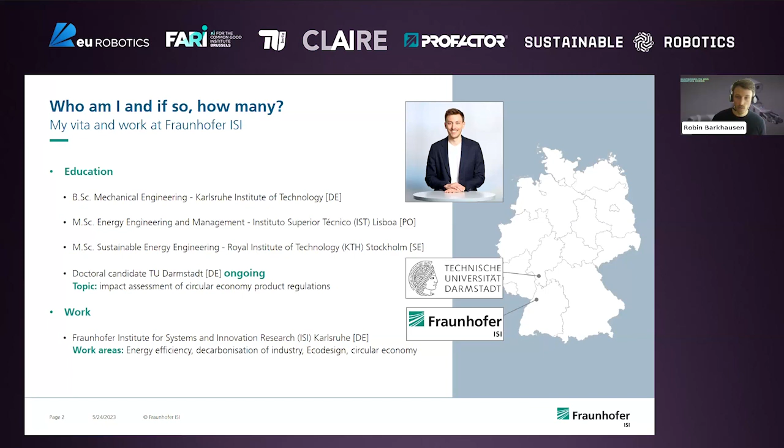A few words about sustainability and the importance of products and product policies. So why to care about product sustainability? I'm aware that this was covered during the last webinars, so I will keep that part short, but I still think it's important to have this as the baseline, also the motivation of why I'm doing what I'm doing.

Then the second part is actually who cares about sustainability? So talking about the policy landscape and in particular the product regulation on EU level, and especially the eco-design directive, since this is my area of research.

Then how to care about sustainability. We learned already about LCA from Paula, so I extend a bit on that by the EU angle with the product environmental footprint. And lastly, a short example of batteries. And of course, I will try to put everything a bit into relation to robotics.

This is overall meant as an overview of what happens on the policy side for products on the EU level and why this is happening.

So sustainability, it's a buzzword, but it's not new. It was in 1966 that a US economist called Kenneth Boulding defined the term spaceship Earth as a metaphor for the finite resources which we have on the planet. And I like it. I think it's a good picture to realize that we are basically cutting down the tree on which we are sitting.

This discussion then started going and became a bit more concrete in 1972 with the Club of Rome, with the scenario analysis of what will happen if we continue current growth scenarios for population and resource use. Obviously, evidently, they found out that it's not really possible to maintain these growth trends. Actually, they did an update on this book 50 years later, and it showed that their earlier estimations were quite accurate. So how do we prevent that?

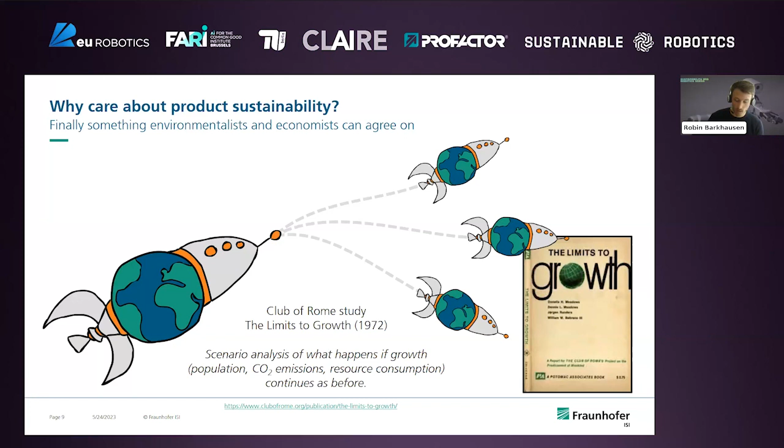I mean, I guess you all know sustainable development: that meets the needs of the present without compromising the ability of future generations to meet their own needs. So we have this concept of intergenerational equity.

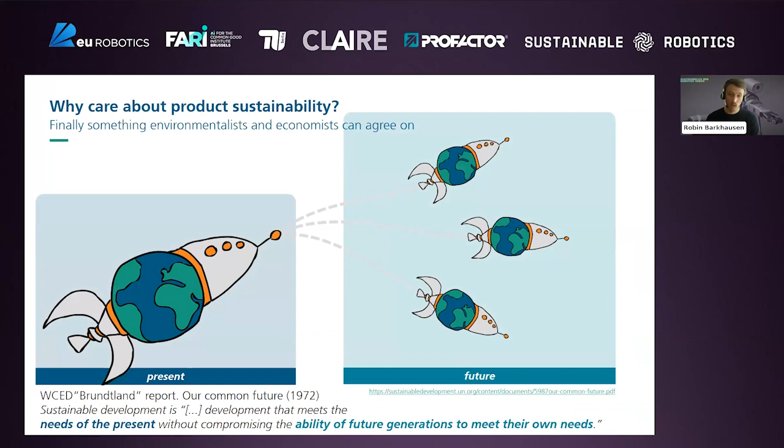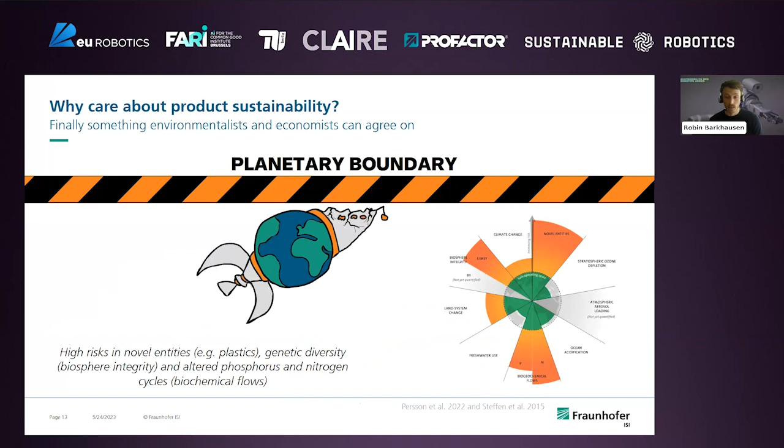And if we jump forward a few decades, then the concept of the planetary boundaries was introduced. I think Damien on his slide was also showing this briefly. So for different environmental impact categories like CO2, biodiversity loss, some researchers try to estimate what are the limits. And actually, as Damien has shown, for several of those, we already are exceeding the safe operating space.

The EU, or the European Commission, with the Joint Research Centre, then wanted to find out how Europeans are actually contributing to this. And they developed the consumer and consumption footprint to estimate the impact of our consumption as Europeans.

And the result is that we as Europeans exceed our share, and especially appliances have a large impact in that, especially in the impact categories of climate change and resource use, where we use up, as Europeans alone, two thirds of the worldwide capacities. So sustainability, there are also social reasons for sustainability.

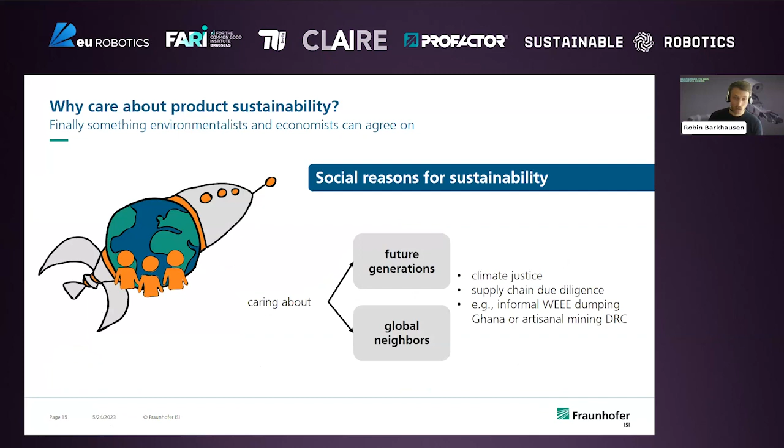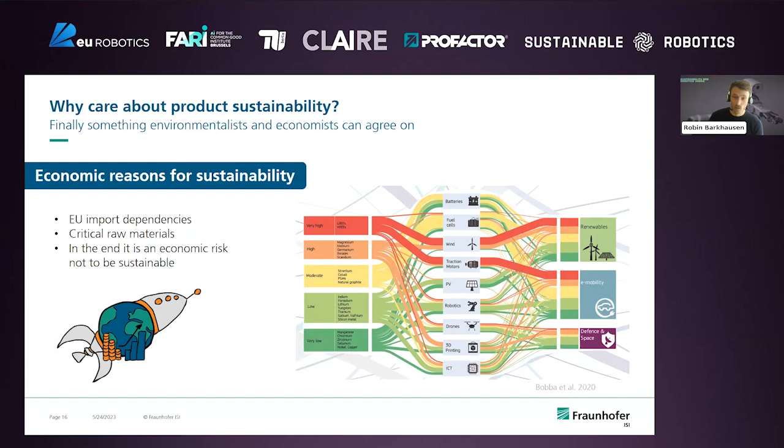You can care about future generations or about our global neighbors. There are economic reasons for sustainability too. There's a high import dependency on many of the key materials which we need, for example, for the energy transition, also for robotics. So it's also possible to say that it's an economic risk to not be sustainable. Overall, there are environmental, social, and economic reasons for sustainability.

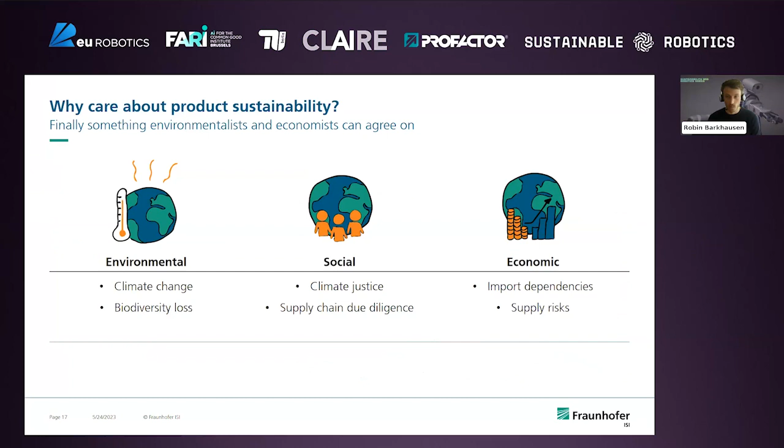Today in the webinar, we focus on the environmental side especially, but of course, everything is interrelated. Especially when we're talking about policies, we always have the economics at the back of the head. So I was checking a bit into robotics, and I found a nice publication, which is from the Joint Research Centre.

It's from 2020, which basically shows which critical raw materials are used in different robotic parts. This just shows that there's actually a lot of critical raw materials used in some form in the robotics sector, making it very relevant to care about these aspects early on, and not when it is too late and we realize we do not have enough of those.

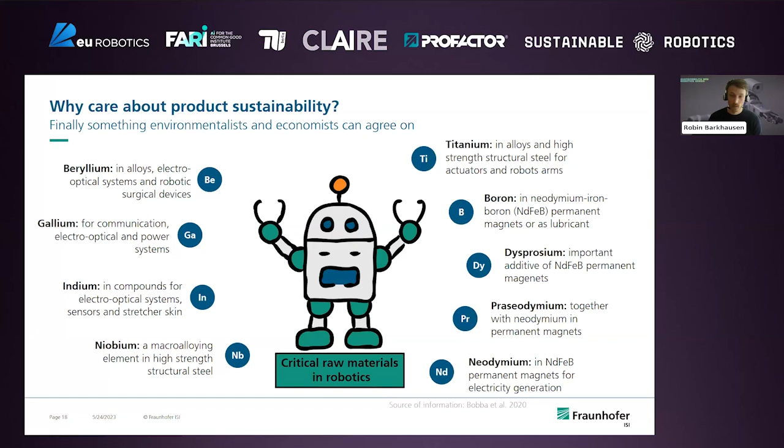So that was basically why to care about sustainability - the environmental, economic, and social reasons. You can pick your favorite.

This brings me then to who actually cares about it, and that's the EU landscape that I want to talk about. I put here a few of the initiatives that are going on in the EU, and I will focus especially on the Eco-Design Directive, since this is my research area. The Eco-Design Framework is basically a policy framework to regulate products with the goal to reduce their environmental footprint.

And the focus so far has been mainly on the energy consumption of the use phase - so how much electricity is my fridge in my home consuming? Under this Eco-Design Framework, we have individual product laws for each product group, in total 27 today.

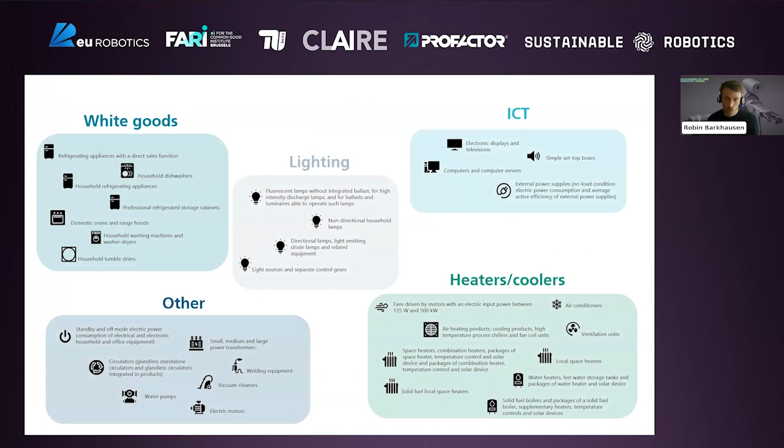I will quickly show which ones those are. We have white goods as the category, so the big white things that are in your houses. We have lighting products, information and communication technology, heaters and coolers, and some others like vacuum cleaners or electric motors, which are of course also relevant for the robotics sector.

We bring those into chronological order. Each bar here represents one legal document, and we count it in green if there are circular economy aspects in those legislations. We evidently see that over time this is increasing, showing that policymakers increasingly care about circular economy and sustainability beyond just the energy consumption in the use phase.

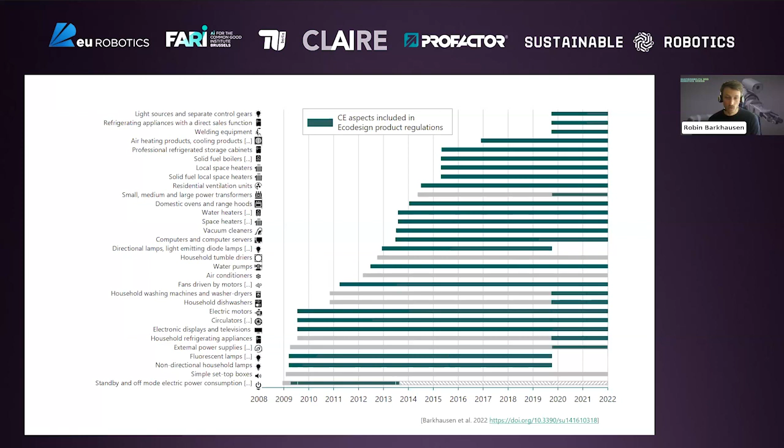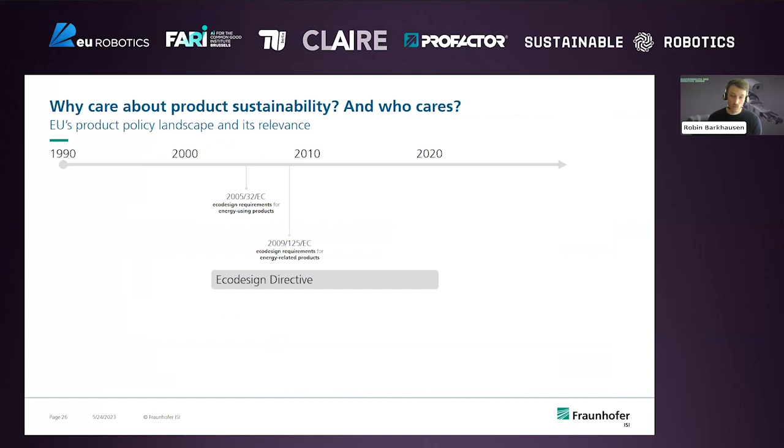The Eco-Design Directive is especially relevant today, and even especially relevant this week, since there's currently an update called the Eco-Design for Sustainable Products, which includes more products. So now we also, for example, include textiles and furniture, which was not the case before, and there's the opportunity for stricter requirements. Earlier this week, there was the first agreement reached in the EU Council on this new regulation.

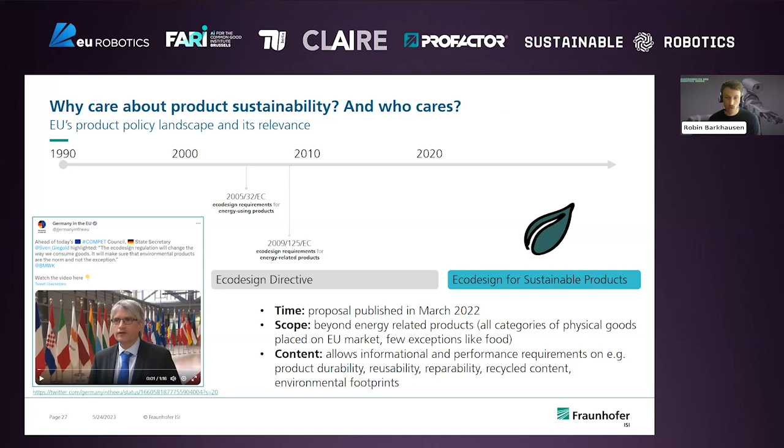We see this on the left, the Twitter post from the German Secretary of State of the Economic Ministry. On the right, we see that now we extend the product scope beyond energy-related products and also beyond energy consumption in the use phase. They make specific notice of requirements like repairability and also the carbon footprint, which is especially interesting to what we're talking about today. So what does this tell us?

Who cares about sustainability? The EU does. And of course, the decisions that are made on the EU policy level are influencing everyone - also companies, and also, of course, people in the robotics sector.

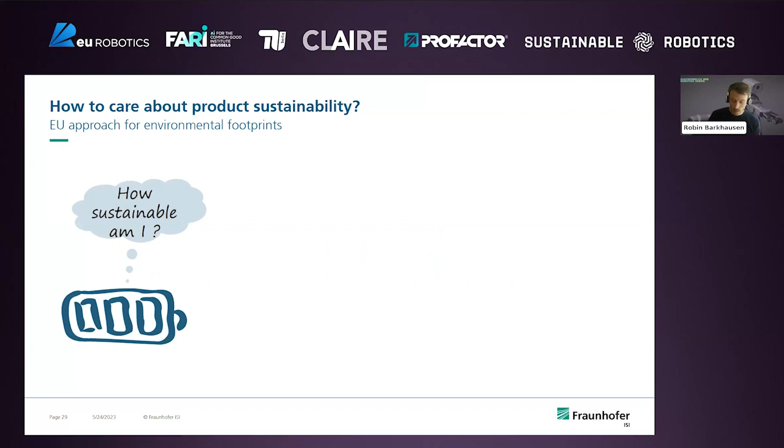If you now ask, but me as a company, as a researcher, how do I care about, or how do I measure sustainability? We learned already from Paula that for the environmental dimension, there is a way with life cycle assessment - a standardized way to assess the environmental impacts throughout the life cycle of a product. As Paula discussed, there are different phases in the LCA.

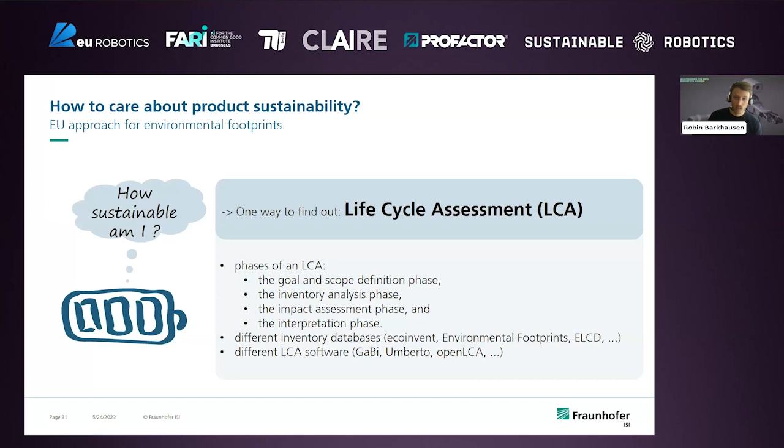You can use different databases for the environmental impacts, different software is there, but despite having this ISO standard, there's a lot of freedom still on how to do it, and it's not easy, as you already learned in the earlier presentations, which makes it difficult to compare different products.

What the European Commission then did was develop a more specified approach called the Product Environmental Footprint, which basically tells you how to do an LCA beyond the ISO standards, so becoming more narrow. By that, I mean the goal is to increase comparability. It's still based on the ISO standard, so it's basically a life cycle approach, and you can consider all the different life cycle stages in that analysis.

And on top of that, it's not the product environmental footprint alone. In addition, you also have product-specific rules, the product environmental footprint category rules, or PEFCR, which are specifically for one product group. For example, they will define the relevant impact categories for batteries, saying focus on these three because they are the most relevant for this product group. They also define default data sources, so if you cannot collect primary data yourself, such as measurements in your factory producing the batteries, you take these values instead, so that it's more comparable.

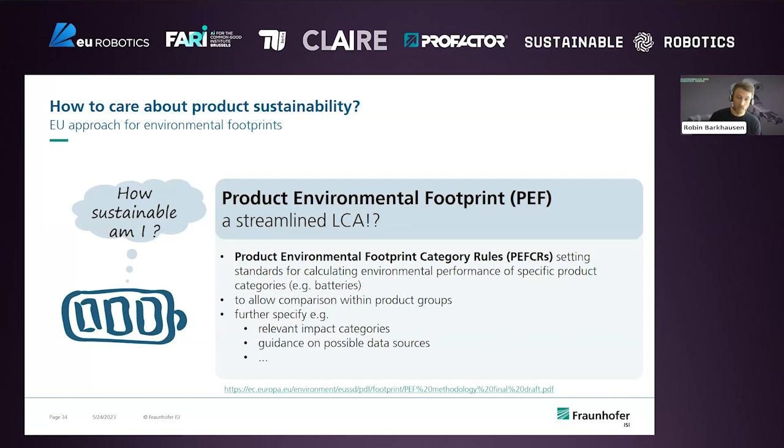So what should you take from this? I think you should take that there is something to measure, and maybe explore to at least find out which environmental hotspots are in your robotic systems. And this brings me to the last part and the example of batteries.

Batteries are interesting because the legislation is very advanced in terms of circular economy measures. There's a recent proposal for a new battery regulation, which will probably be published or enter into law this year. In this proposal, they actually include a carbon footprint, which is very innovative, going beyond what has happened for other product groups.

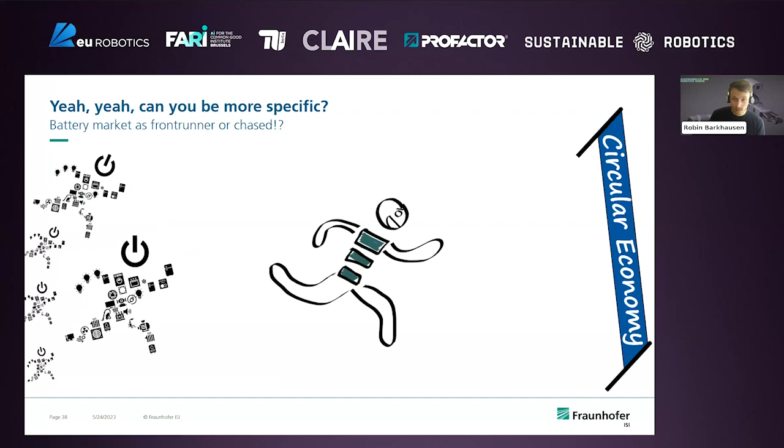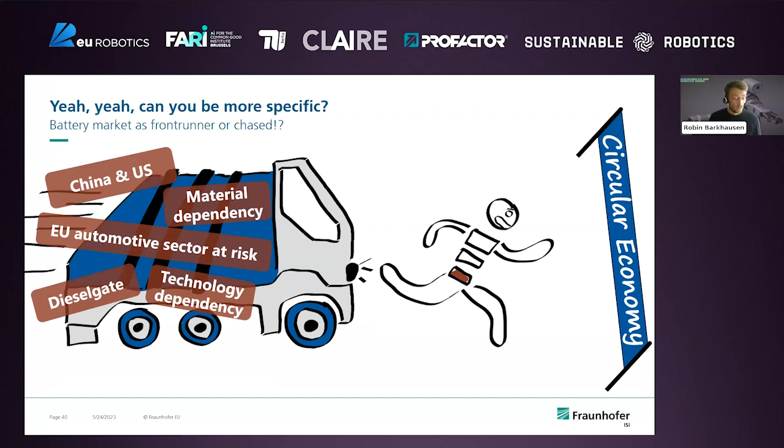So based on this, you could say that batteries are the front runner compared to other product groups, but maybe they are also rather chased. Why chased? By technological and material dependency, and the European automotive sector being at risk with electric vehicles. Because with this evolution from combustion engines to electric vehicles, the heart of the car, which used to be the combustion engine, now shifts to the battery, and there's a high dependency in Europe for that.

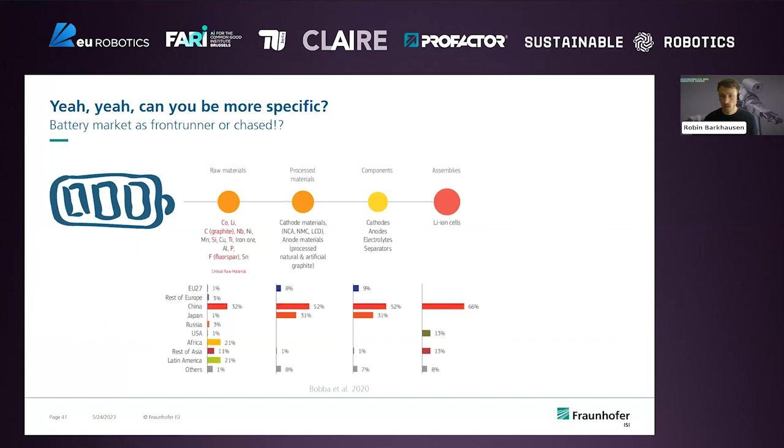Here we see the technological dependency. Throughout the entire supply chain, a lot is coming from Asia, from China and Japan, and from raw materials as well. Lithium coming from Australia, but also a lot from South America where the largest resources are, and cobalt, over half of the worldwide resources are in the Democratic Republic of Congo. So the EU is completely dependent.

This brings me back to this ambitious legislation, where you could say that the legislators had to act because the battery sector, or in effect the automotive sector, was a bit too late to realize this trend. The EU now has to put a lot of pressure on manufacturers towards circular economy, with the aim to decrease this material dependency, so we get the materials back which we have in the cars, and also to differentiate EU batteries, or label them as green batteries, to create a competitive advantage or unique selling point for European batteries, to help this industry be built up in Europe.

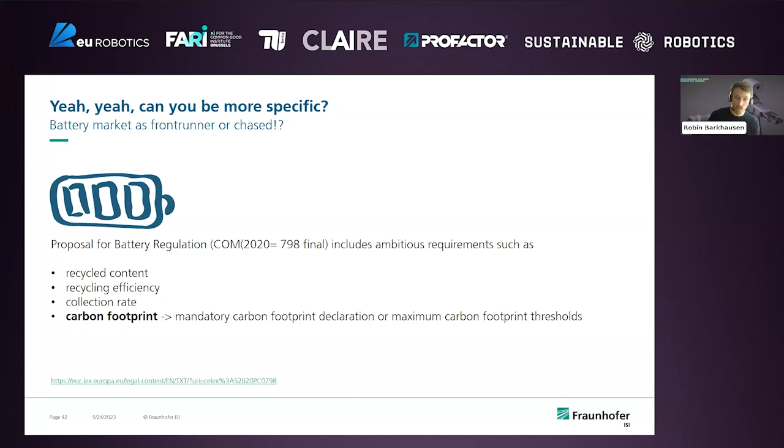So in the end, these ambitious circular economy and sustainable policies can be seen as a way to protect the automotive sector. This may be the message for the robotics sector: it makes sense to consider sustainability early on, to become a front runner. The examples we already heard of innovators like Seppe with self-healing materials, and Damien with eco-design for robots, show that this is already happening in parts. I think it can be framed very positively, that this can be the competitive advantage, the global competitive advantage of the EU, to be more sustainable than the others.

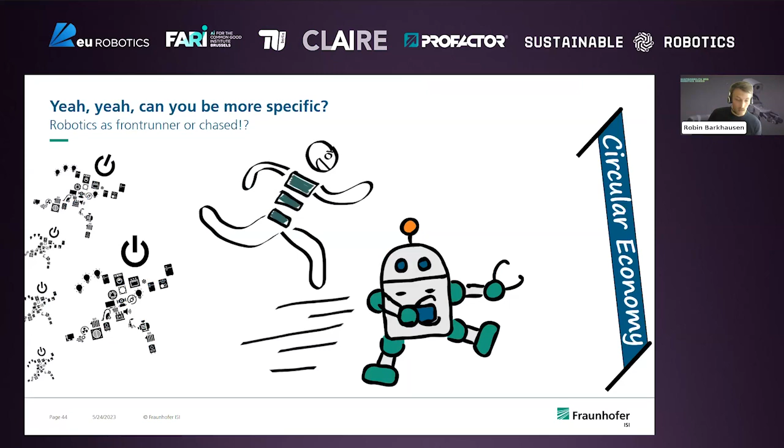And this leads me to end with the picture of the vision, or maybe it can be. Thank you very much for your attention.